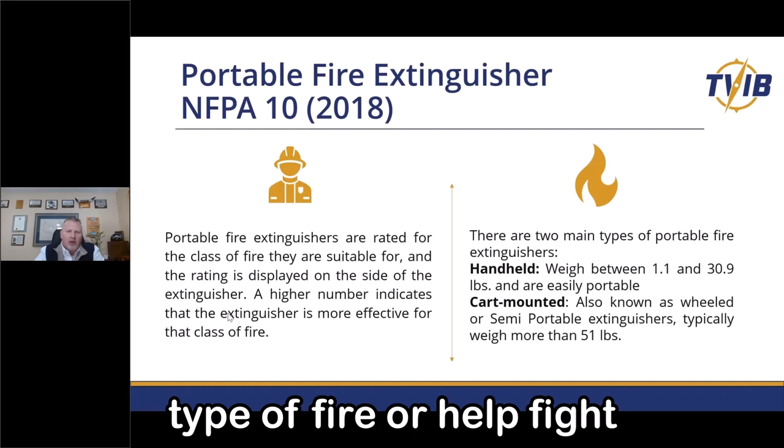You've got your Alpha, Bravo, Charlie, and Delta fires, and each extinguishing device is going to be designed to put out that type of fire or to help fight that fire and minimize the damage it's going to cause. There are two main types of portable fire extinguishers that we're going to discuss. One is handheld, and normally that's about 1 pound to 31 pounds, and just easily portable. And then we've got our cart mounted, we call them a semi-portable. They're also known as wheeled and typically weigh more than 51 pounds. And we'll touch on those a little bit toward the end of this.

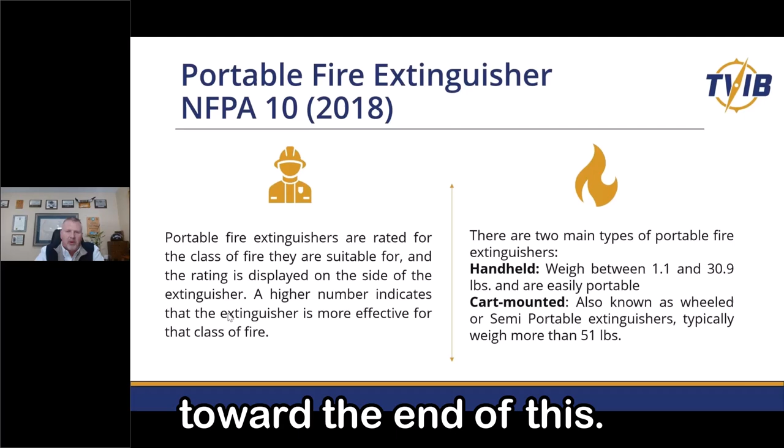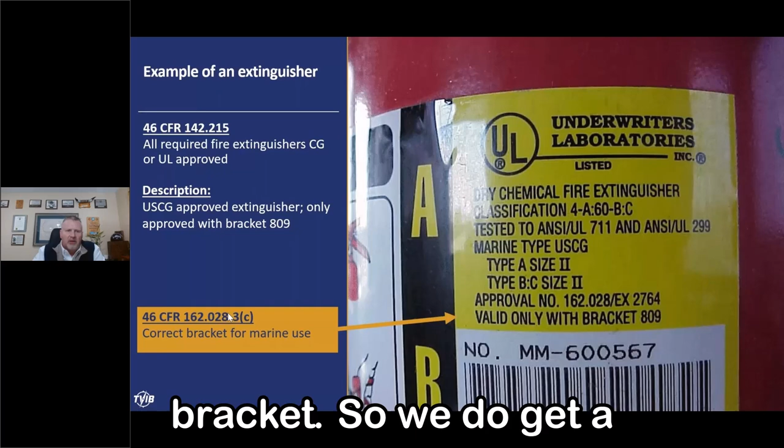And then we've got our older coding on here, and this is where the crosswalk's going to come in here in just a little bit. We'll talk about that. But this is a size 2 or a Bravo Charlie size 2 as well. And then it gives you your approval number. And then one important item we want to take a look at on here is the bracket. What bracket is supposed to be with this extinguisher? And you can see here it identifies it's valid only with that approved bracket. So we do get a lot of questions concerning the bracket. Just want to take a minute with that and kind of share some of the brackets that are out there and what we're looking for.

Now we want to make sure that we are utilizing Coast Guard brackets. And we have had some appeals or requests for consideration where we've worked through that process with the NCOE and ran it up to CVC. You may be thinking, well, I've got the ones that have the rubber strap, that have the tightening locations or grommets on them. We have been told that that is acceptable. The big thing we're looking for here is, does it fit the extinguisher? Is it rated for that extinguisher?

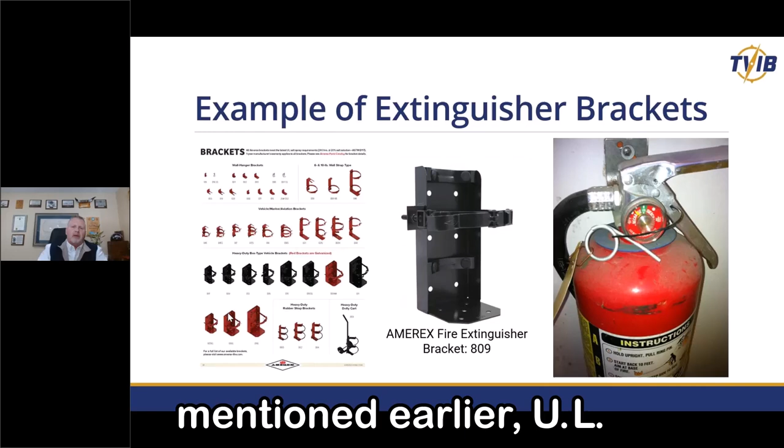I mentioned earlier UL approval. They used to have a UL approval or equivalency for the fire extinguishers, where if they were not Coast Guard approved or UL approved, you could go to the website and pull up that extinguisher and identify whether or not it was equivalent. 18-04, the policy letter released in 2018, addresses that and has superseded that guidance and information. So that's going to be our bread and butter policy letter to go to for fire extinguishers, 18-04.

With that website, I've included the web address here, productiq.ulprospector.com. This is a free website. I've registered on it myself, and it makes it easy if I need to go into a UL 217 for a portable smoke detector, or want to find out if the extinguisher in this case is actually what I need, or if what I have is equivalent and is rated for marine use. So those are some of the questions that can be answered on this website. Again, very user-friendly, so a great tool for you.

So next we want to talk about the exam and testing requirements for portable fire extinguishing equipment. 46 CFR 142.240(a)(1) is what takes us out to NFPA 10, Chapter 7 and 8, and provides us all of our guidance. So we always talk about applicability and how do we get out of subchapter M and into our next reference. This is the cite that you'll use that takes you directly out to NFPA 10 for your inspection and testing.

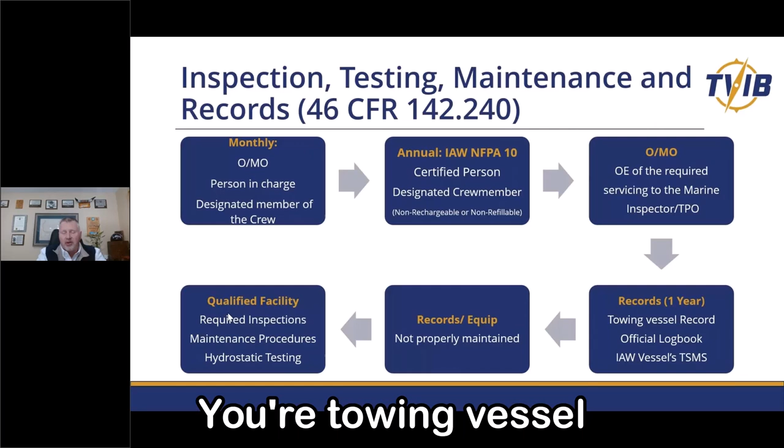The owner or managing operator as well needs to make sure they can provide objective evidence in the form of records, testing, inspections, tags, tangible objective evidence that shows that the required servicing is being done, and that needs to be readily provided to your Coast Guard Marine Inspector or to your TPO if requested. We want to make sure that we keep those records for at least 1 year, and there are a couple different ways for you to retain those. Your towing vessel record, your official logbook, or in accordance with your vessel's TSMS. So if you've got Synex or TowWorks or different systems that help you maintain your maintenance, identify that within your TSMS, and you can utilize that as your records.

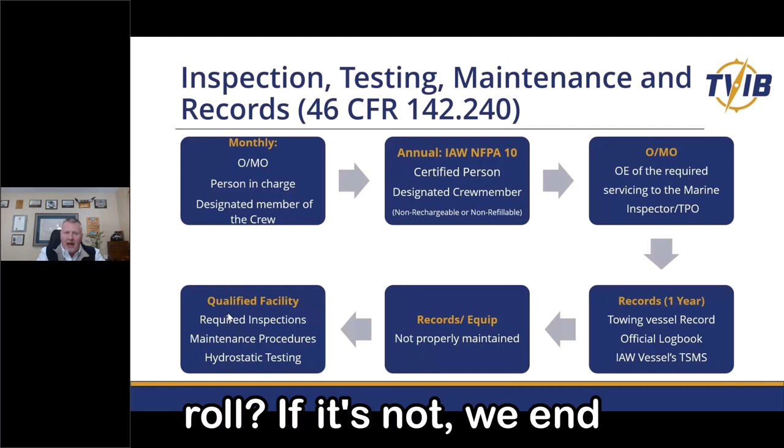From there, you're pretty much set up, but now the concern is, are we able to provide those records for the equipment? Does the equipment meet all the inspection criteria that we'll talk about here in just a few minutes? And is it ready to roll? If it's not, we end up heading kind of a different direction, and the Coast Guard or the TPO can require that all maintenance is conducted by a certified technician from a qualified facility. So those are some of the things that we need to really be aware of. If your designated person is taking care of it, we've got them identified in the TSMS, and they've got a maintenance procedure or an inspection procedure that they're signing off, and we want to keep those records for at least 1 year.

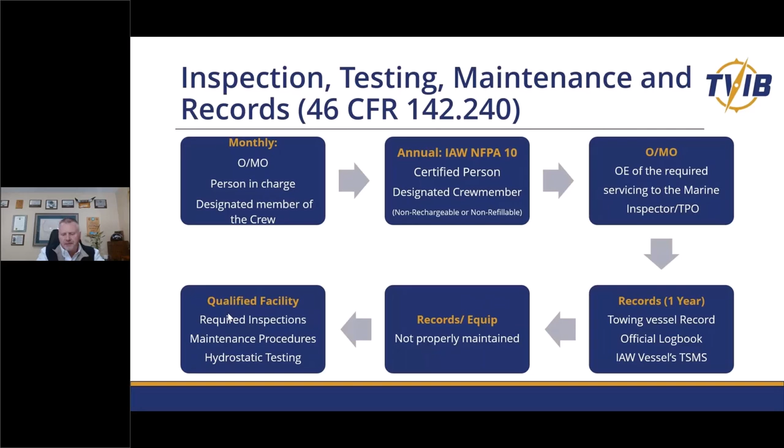So just talking about some of the survey procedures, I pulled this right out of the NFPA 10 and just want to share these with you. Some of it is common sense stuff, but some of it might be things that you could add or work with. Right out of the gate, is the equipment in its designated place?

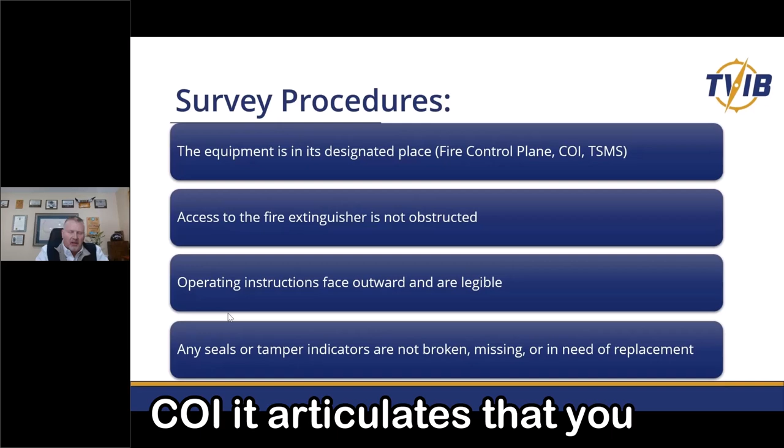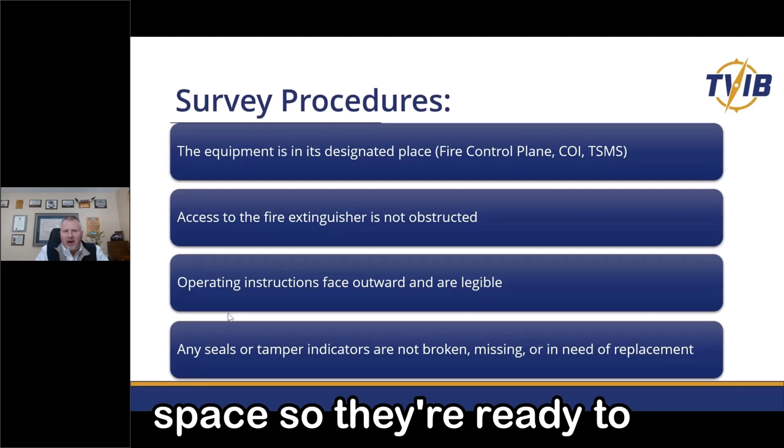If your vessel has a fire control plan or your COI articulates that you need to have extinguishers in certain locations, or if your TSMS identifies that you want an extra extinguisher in a certain area, bottom line, they should be readily accessible within a passageway or an entrance or exit to a space, so they're ready to go in case of emergency. We want to make sure that the access to the fire extinguisher is not obstructed, that the operating instructions face outwards and they're legible.

A lot of the time these will get scraped up because you're taking them in and out of their bracket. You want to make sure that those stickers and the instructions are there and can be read. Any of your seals or tamper indicators are not broken, missing, or in need of replacement.

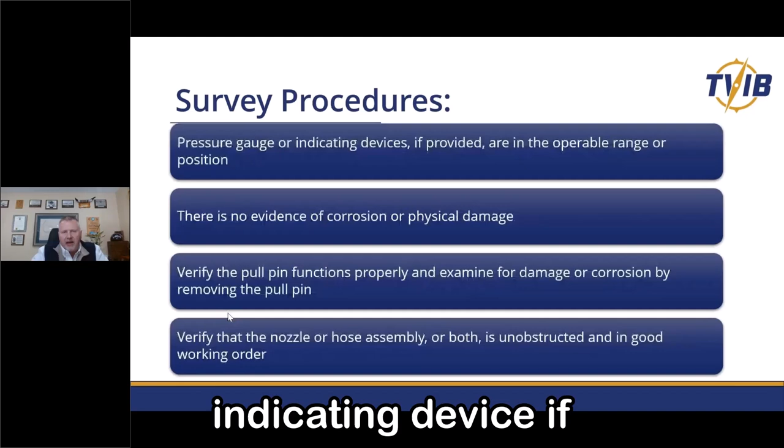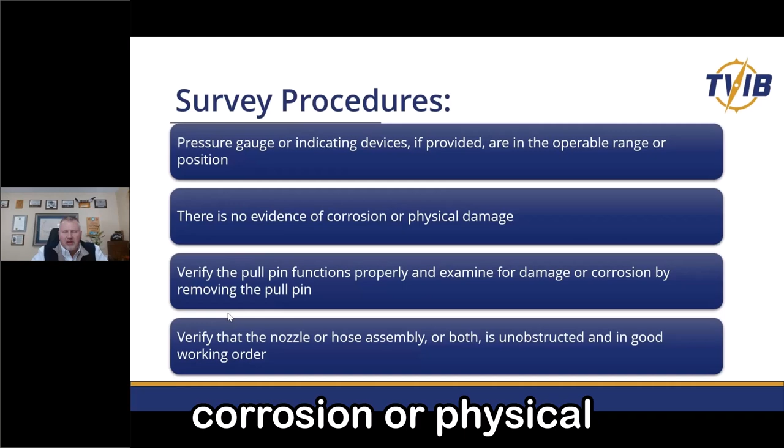We want to make sure the pressure gauge or indicating device, if provided, is operable and in range, not cracked or damaged, hanging loose, or anything that would impair its ability to actually provide you accurate information. We want to make sure there's no evidence of corrosion or physical damage. If they're dented or they have corrosion, they're actually to be taken out of service and need to be replaced.

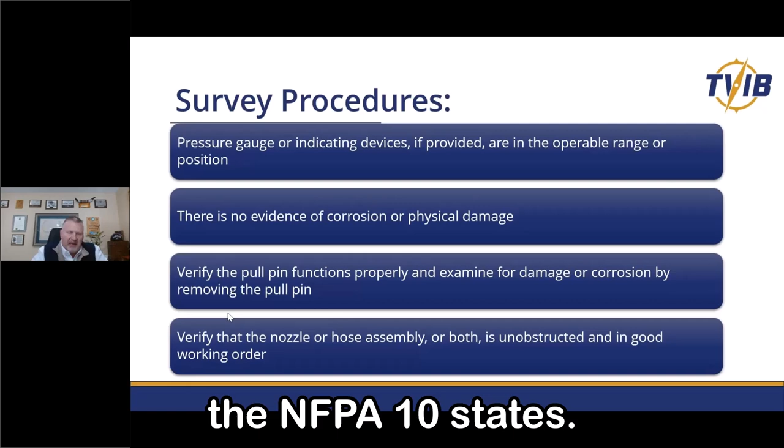You can verify the pull pin functions properly and examine for damage or corrosion by removing the pull pin. This is what the NFPA 10 states. Personally, I don't pull the pins out, it just provides an opportunity for an accidental discharge if you're not familiar with the device. So pull the pin when you're getting ready to use it, just make sure it's not bent, damaged, and that it moves freely within the location that it's stowed.

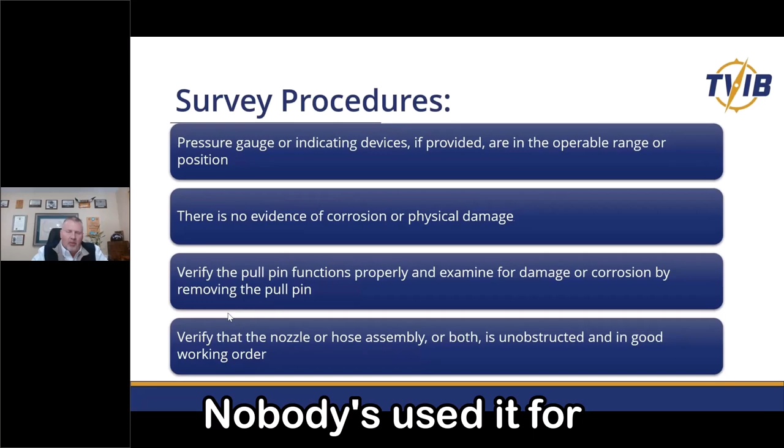Verify that the nozzle or hose assembly is unobstructed and in good working order. Look for any cracks. Make sure that the nose of the cone is in good condition. Nobody's used it for stuffing paper towels up and inside of. It's amazing what those discharge nozzles can get used for sometimes. So we just want to make sure they're ready to go.

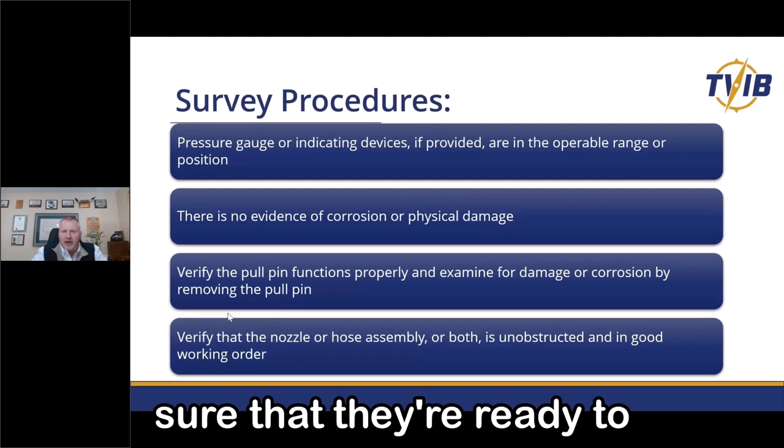Again, we want to make sure that the extinguisher has the minimum UL rating for the space it's intended to protect. So that's going to be identified when you get your COI based on your length or gross tonnage or horsepower rating within the vessel. We want to make sure that everything is where it's intended to be. An example of this is the paint locker requires at least a 40-B.

And if the existing B-II is also rated for a 40-B or greater, the extinguisher is in compliance. If it's not, it could be a B-II, but it's not at least a 40-B for the performance indicator, then that extinguisher is not in compliance, and we want to move that out of there and get the right one. And we want to make sure the hanger bracket is the correct one.

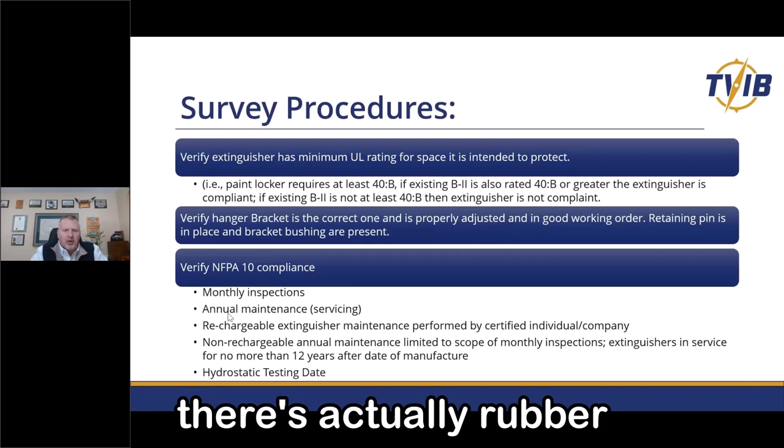We've already discussed that, but we really want to make sure it's properly adjusted and in good working order. The retaining pin is in place and the bracket bushings are present. On the B-II, you'll notice that there's actually rubber bushings on the interior retaining arm, and we want to make sure those are in place so we don't have metal on metal scratching the paint off, which allows for corrosion and really starts to increase the opportunity for degradation of your extinguisher.

Some of the other things we want to take a look at, and we've talked about just a little bit, verify that it's in compliance with all these things that we've just discussed. We want to make sure our monthly inspections are getting done, annual maintenance and servicing, rechargeable extinguishers, non-rechargeable annual maintenance, limited to the scope of the monthly inspections, extinguishers in service for no more than 12 years if it's a non-rechargeable, and then your hydrostatic testing date.

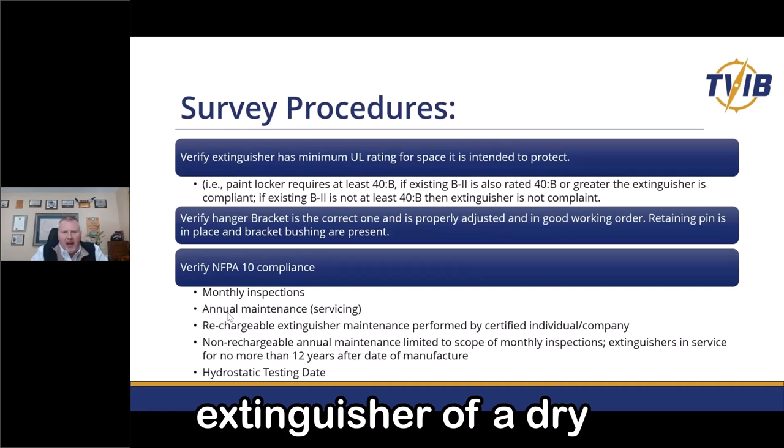For your CO2, you're looking at every 5 years, and for an extinguisher of a dry chem type or dry chemical, you're looking at every 12 years. So if you've exceeded the 5-year on CO2 or 12-year on a dry chem, you'll want to make sure that that extinguisher is removed and you've got a plan in place to track those.

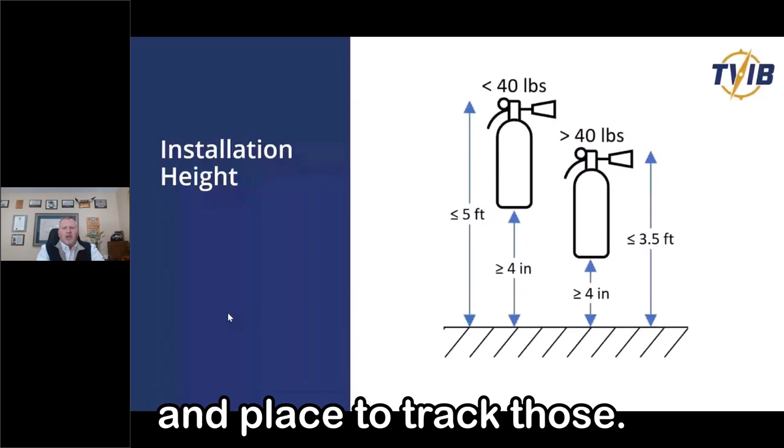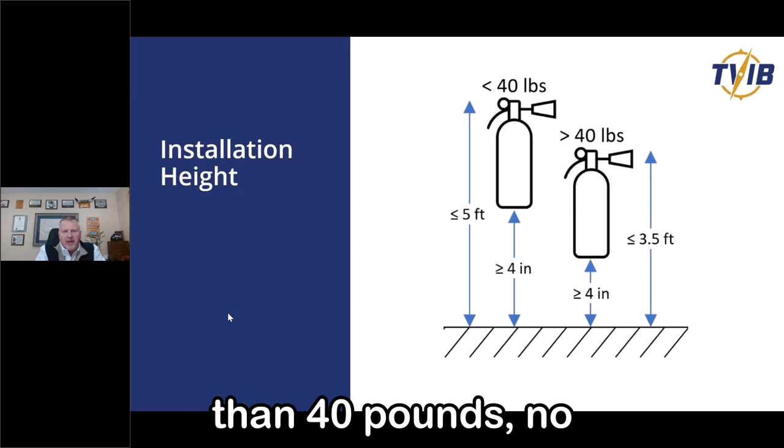We talk about the bracket and we talk about stowage. Some of the things we want to make sure of is that the extinguisher is no less than 4 inches off the deck. So we're looking at a minimum of 4 inches. If the extinguisher is greater than 40 pounds, no greater than 3.5 feet to the top of the extinguisher. And if it's less than 40 pounds, we're looking at 5 feet. So 4 inches off the deck, 3.5 for 40, 5 for less than 40.

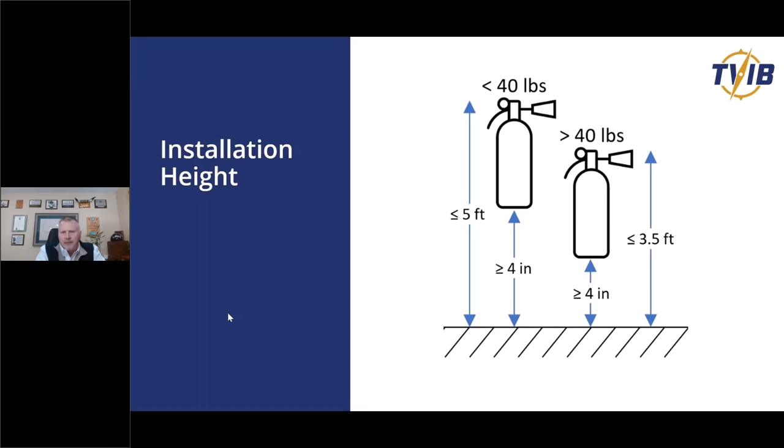And all this information is contained within the NFPA 10 if you have any questions. And you can also pull up the policy letter 18-04, and that'll help provide you some additional guidance.

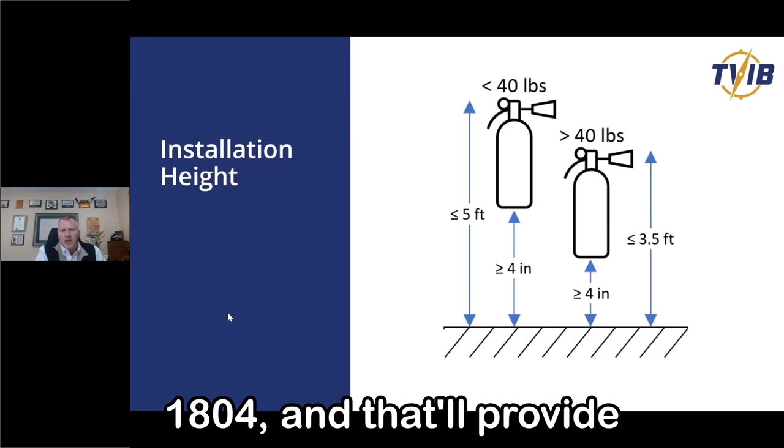Flammable storage lockers. We all talk about these quite a bit. We want to make sure that any of our flammable storage lockers provide easy accessibility. We want to make sure it's free from any blocking by storage and equipment, or both of those. We want to make sure that it is near the flammable locker. We want to make sure it's free from potential of any physical damage, and we want to make sure that the extinguisher is readily visible.

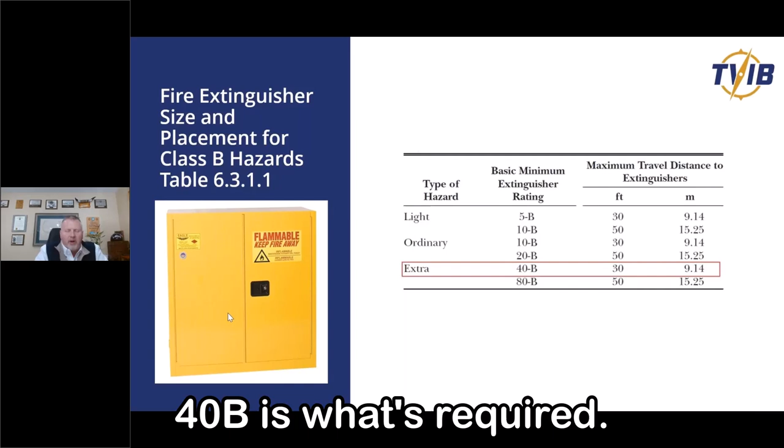So in 6.3.1.1, it gives us what our hazards are and what we're looking at. So this is the table for a Bravo type or a hazardous locker type extinguisher. And you can see that we've got a basic minimum extinguisher rating of 40B is what's required. So we're looking for a maximum travel distance of no greater than 30 feet. And that 30 feet includes, do I have to go around the skiff on the back of the boat? Do I have to move around something?

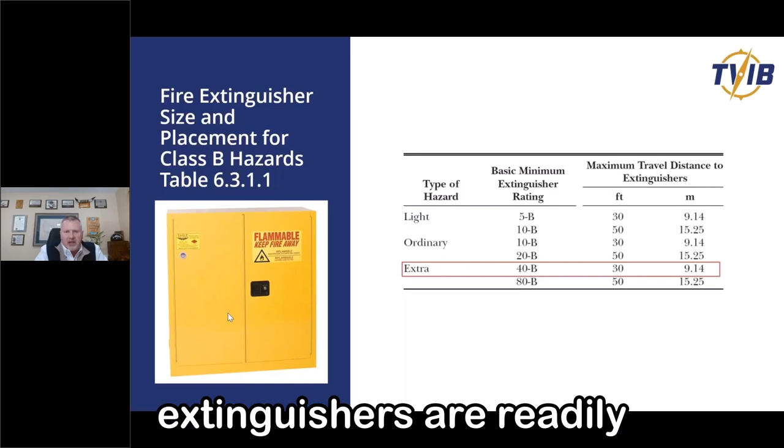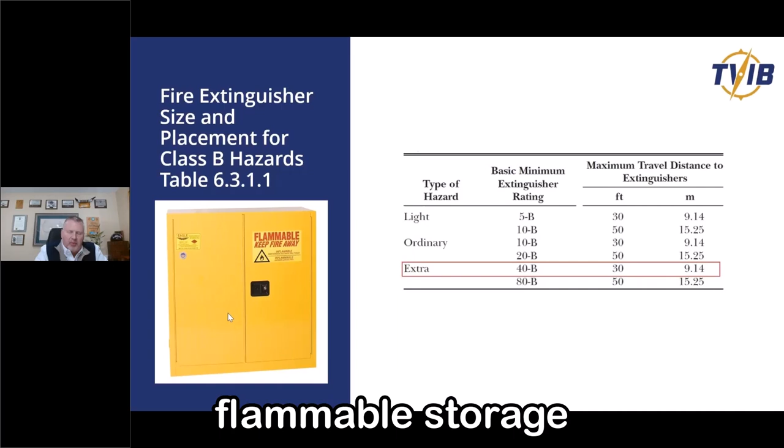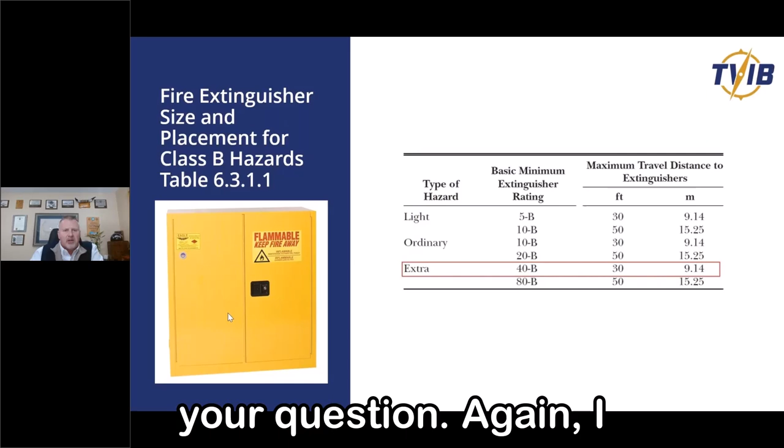We want to make sure these extinguishers are readily accessible and easy to get to. So not up above all the flammable storage. I'm not saying you can't mount them to the flammable storage locker, but it compromises the UL rating of the locker. And personally, I don't want to be reaching for something to put out the fire and have to reach through the fire or work my way around the fire. So that provides us with our definition and information for near. So I hope that answers your question. Again, I know we've had a lot of questions about that specifically.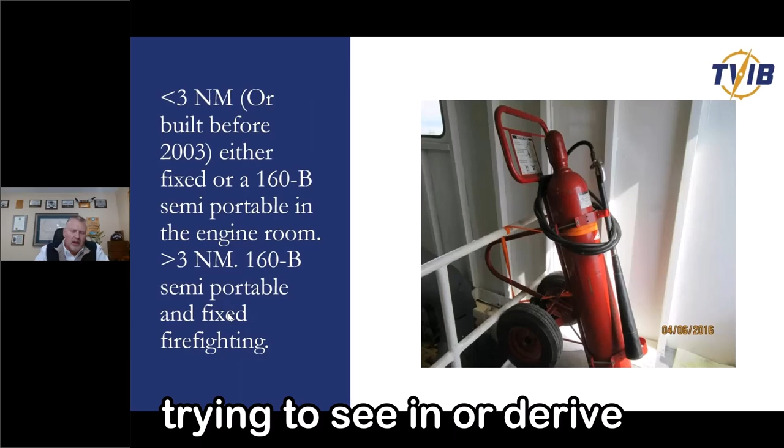Semi-portable. We do have some questions about this. We're still trying to derive from 1804 what exactly the location is. When our vessels were uninspected and regulated under subchapter C, specifically it said that these could be stored in the engine room. They're for that space. They're to protect that space. Looking through 1804, and I'm sure based on the COI renewals and the Coast Guard inspection, the CFR does indicate permanently affixed, but we aren't operating in heavy seas. We're operating, majority of us, on the western rivers. So we just want to make sure that it's secured, readily accessible, and that we can get it into operation as quickly as possible.

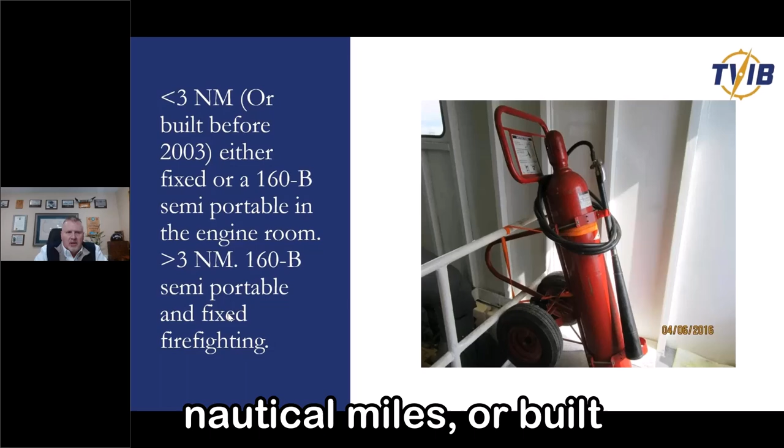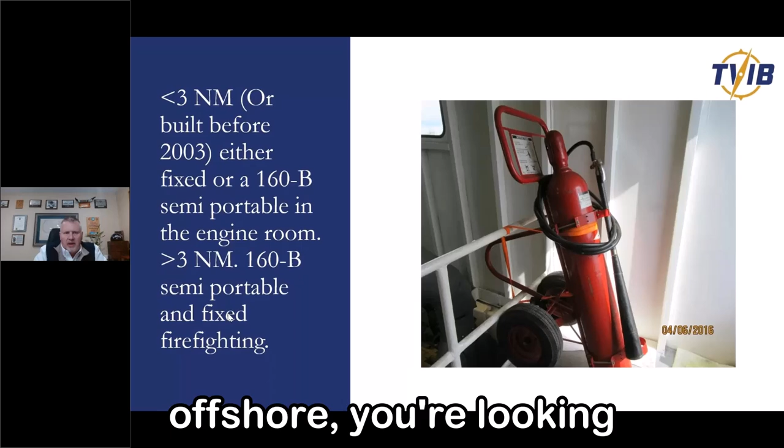So if your vessel is less than 3 nautical miles or built before 2003, it's an either or situation. You can have the 160 Bravo or a fixed system. And then if you operate greater than 3 nautical miles offshore, you're looking for a 160 Bravo or a B5, depending on the age of it, and also that fixed firefighting system.

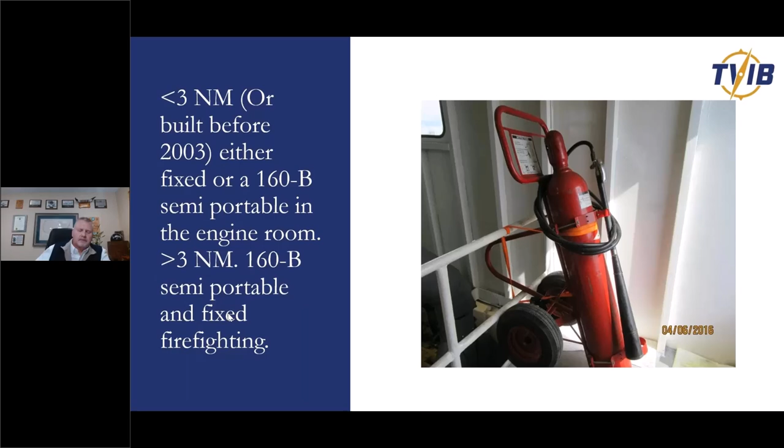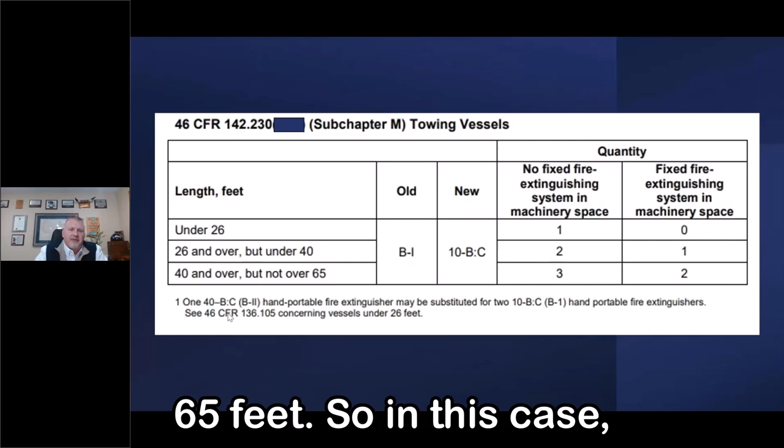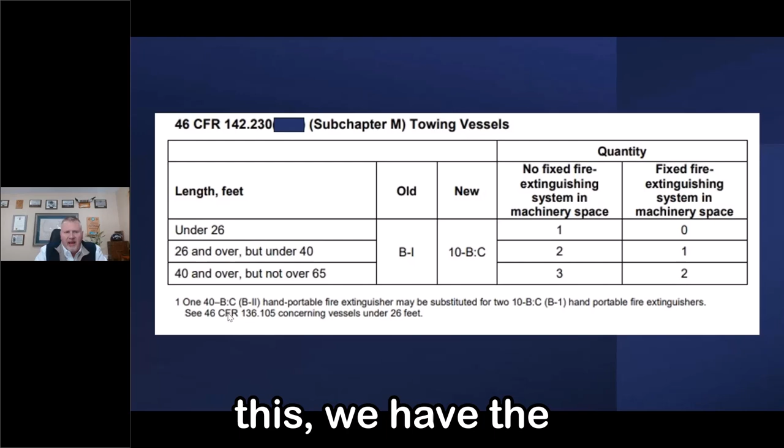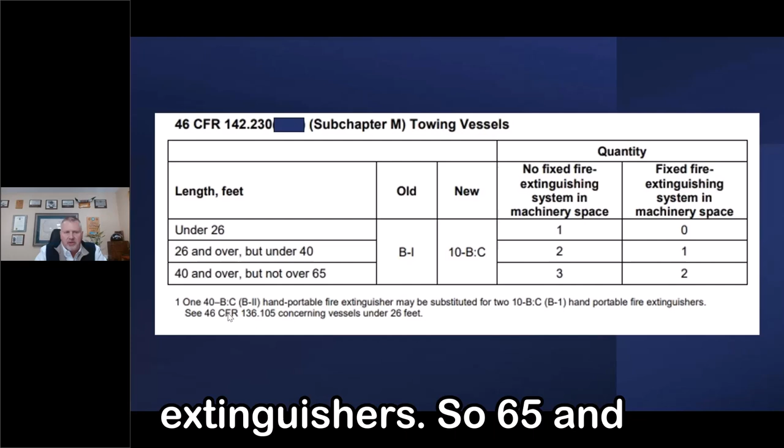So this is the policy letter 1804, again came out in 2018, April 3rd. This is the chart that's provided for any of the vessels under 65 feet. So in this case, you can have a Bravo 1, and that's the equivalent of a 10 BC. And then based on the length of the vessel, that is going to tell you how many you need and where they need to be located, or if you need a fixed system. And then also on this, if you have one 40 BC, that is the equivalent of two 10 BC or B1 handheld portable fire extinguishers. So 65 and below, you have an opportunity for an equivalency.

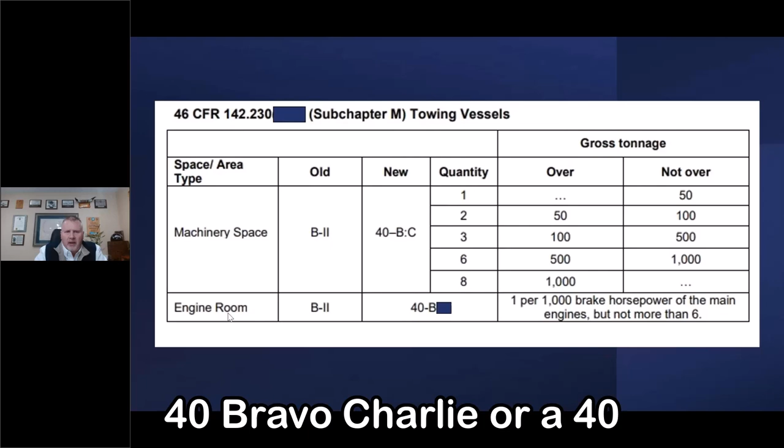Now, I did get asked, does this carry over to 65 and above? And we've had this discussion, worked through the NCOE, and had some great talks with them. And that equivalency is not applicable to the vessels greater than 65 feet. So in this case, we're looking at a B2, or under the new performance factor a 40 Bravo Charlie or a 40 BC. And in the engine room as well, for every 1,000 horsepower of the main engine, you're looking at an additional 40 Bravo.

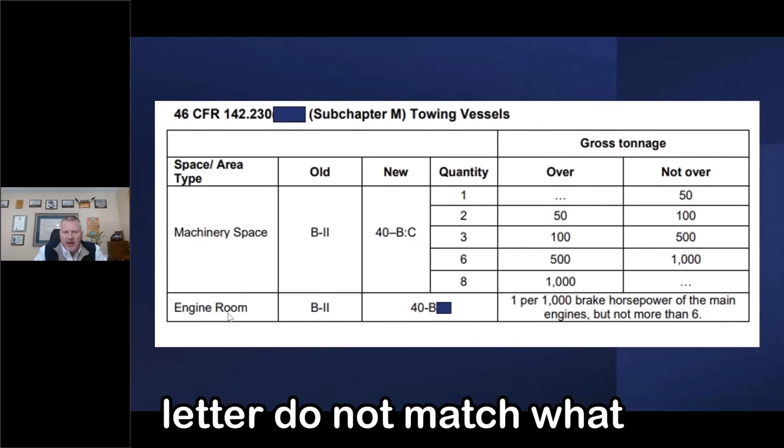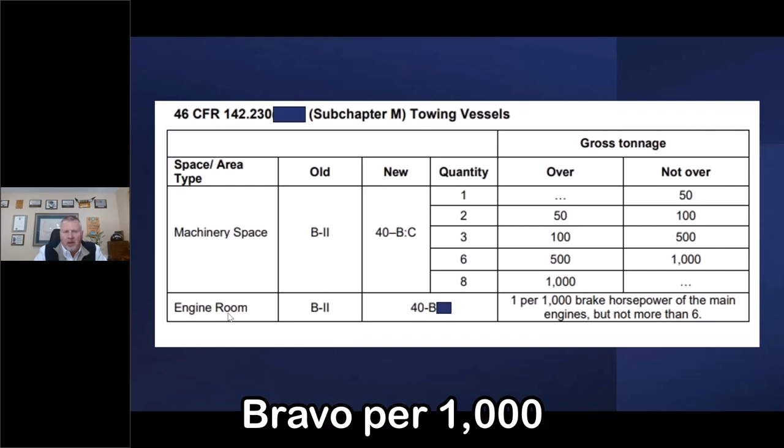You can see that I've blocked out the information on here and actually shared it with the NCOE while we're working through this, that the charts within the policy letter do not match what is within the CFR. So policy letter is not regulation, and we're going with what the reg states, which is one 40 Bravo per 1,000 brake horsepower, not to exceed 6. That's what the blank is.

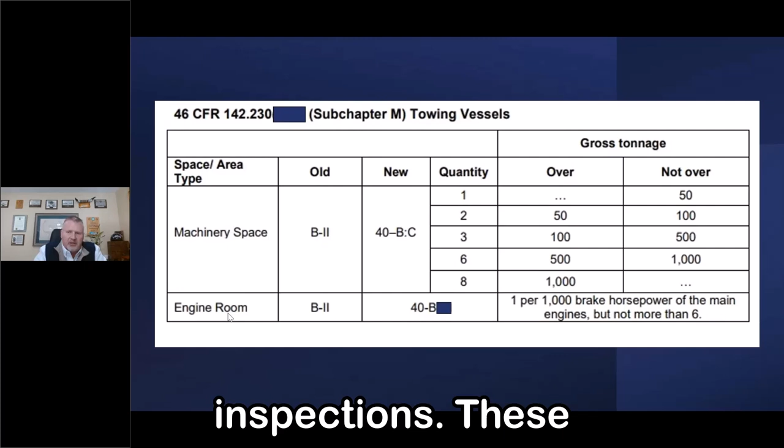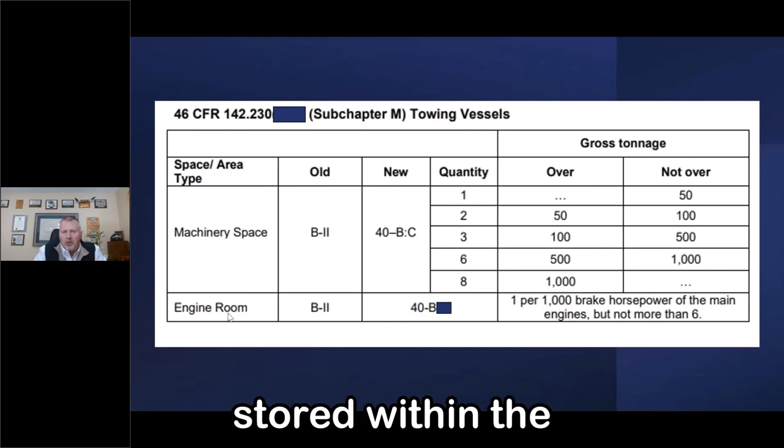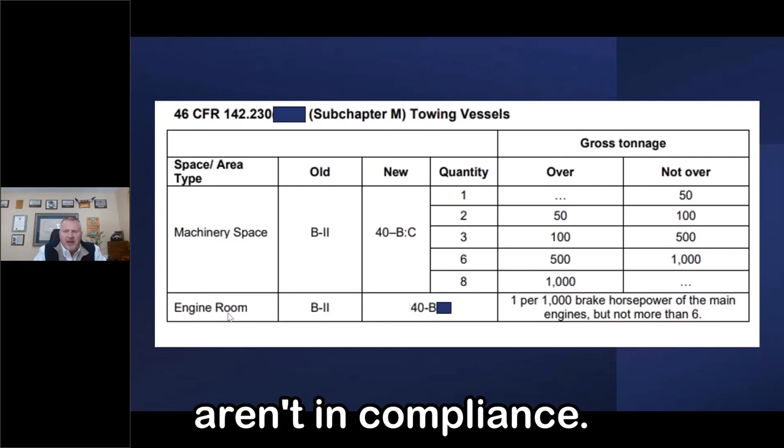I mentioned that I've talked with the NCOE, and a couple of the findings have been readily identified on COI renewals or Coast Guard mid-period inspections. These extinguishers are not necessarily in the engine room. Those engine room dedicated fire extinguishers must be stored within the engineering space. So if you've got it stowed outside of that space, but you have that number on board, you aren't in compliance. You'll need to make sure you get all the extinguishers within that engine room and get them properly mounted throughout the space.

So, certificate of inspection. We just talked a little bit about horsepower and the impact it has on what is required as far as our portable fire extinguishing systems. So just an example, a lot of you may be looking at a repower. We've talked about that. We've had a lot of those done. And we really get into the design verification and a lot of the other items and focus on the repower.

But sometimes we forget that, let's say we're running two 1,800 horsepower main diesel engines. Well, we're at 3,600 horsepower. Now we bring in two 2,000 horsepower engines. Now we're at 4,000. So we actually need to make the adjustment and add a fire extinguisher based on that horsepower rating. And we need to make sure when we're talking with the Coast Guard, we ask that it gets amended on our COIs and we bring that up.

When we go through the renewal process and we check that box on the 3752, it says, hey, we've done a repower, we've gone through a process. They should be looking at, did that horsepower increase and are all requirements being met as far as firefighting and other applicable regulations. So just something to keep in the forefront of your mind as you're working through those repowers.

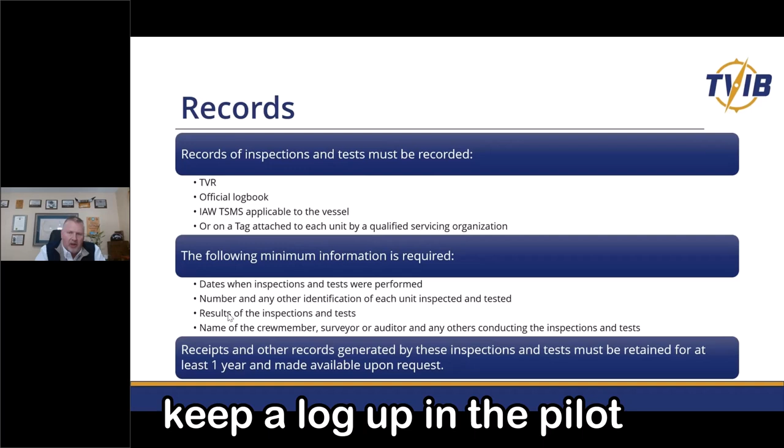The following minimum information is required. We talked about that, the date when it was done and the test that was performed. They can relate a number to it. So sometimes you'll keep a log up in the pilot house and it'll say number 1, 2, 3, or 4, and those will relate to the documentation that can be reviewed by the Coast Guard or the TPO. We want to make sure we identify what the results of the inspections and testing were, as well as the name of the crew member, the surveyor, auditor, and any other individual that may have been conducting the inspection or test. And again, we want to make sure we keep all of that for at least 1 year.

So that kind of wraps up portable fire extinguishers. Like I said, there's not a ton going on there, but there are a lot of small little things that can catch us and impact our operations. Some of the things we want to make sure we don't let happen: we don't want to let our deadlines pass. If we have the Coast Guard coming on board and we do not have the documentation and we're outside that window, now we do not have an approved firefighting capability as far as the COI, and it can go anywhere from a major nonconformity and unsafe condition to fixed on the spot and a conversation. It just really depends on who your surveyor is. If you're out there for TVIB, it's definitely something we need to be made aware of and work through the process with the company and the vessel on.

Remember, those additional 40-Bs need to be in the engine room. And one big question we have had, but I did not address while we were talking about flammable storage or hazmat: you are not required to add a 40-B if you add an additional locker. So we've been asked, hey, I'm going to put another locker on the stern, do I need to put another fire extinguisher in? At this time, as per the NCOE, you do not. The regulation calls for one additional 40-B to be stored near your flammable storage locker, and near is 30 feet. So just wanted to share that with you.